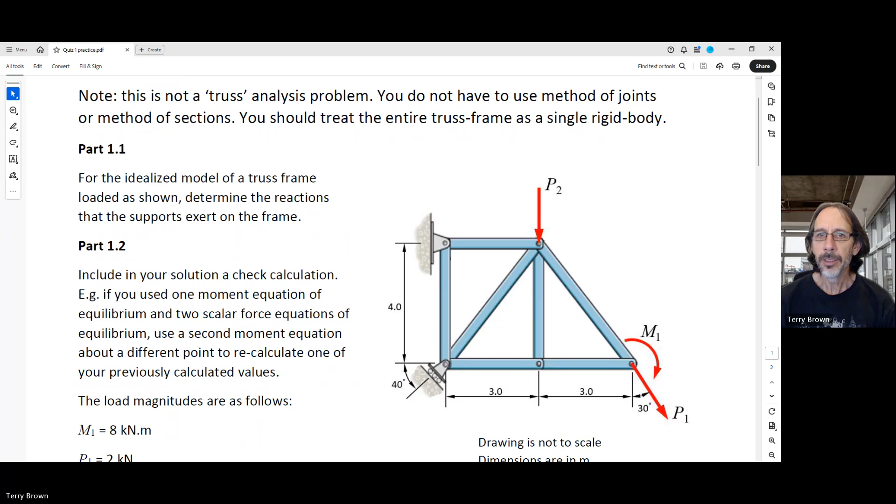Then down here, at the moment we've just got these letters here representing the loads, and we're given the magnitudes of these forces and moment over here. So in the quiz, every student will have a different value for these loads depending on their student number. Okay, so that's the equilibrium part where you look at determining the reactions.

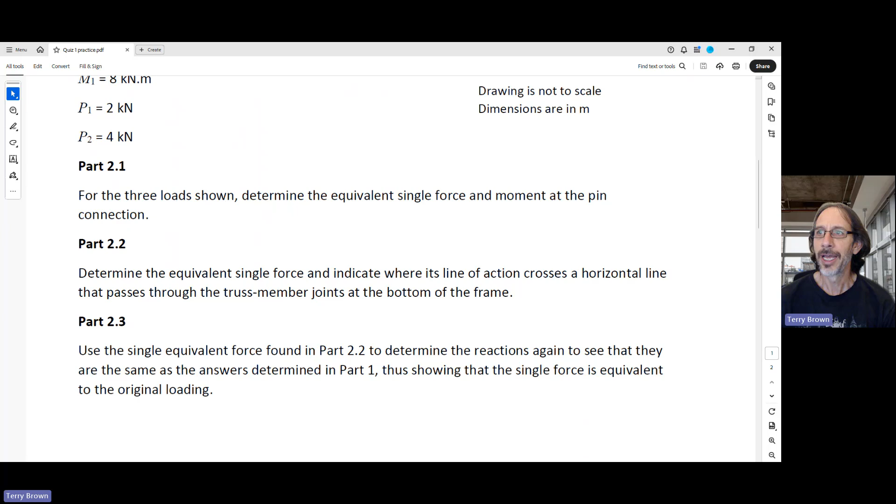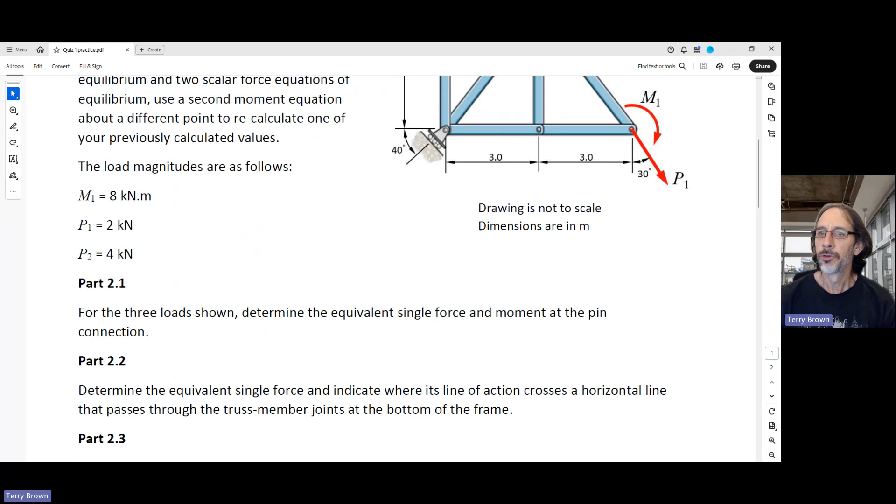And then the second part is to look at equivalent forces and moments and the equivalent single force. So to start with, for the three loads shown, determine the equivalent single force and moment at the pin connection. So up here. And then after that, determine the equivalent single force. So no moment, just a force only. What's the equivalent single force? And indicate its line of action that gives us the same loading, external loading, as what we found in 2.1, and also that we had to start with our three separate loads here.

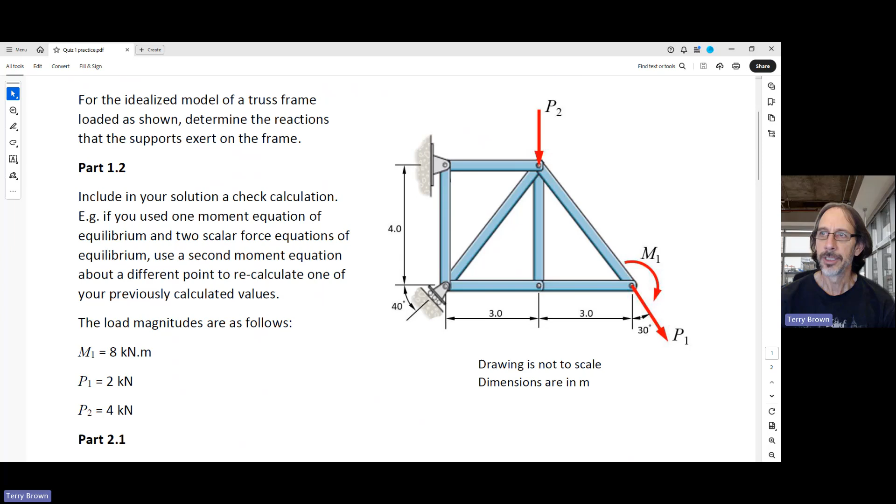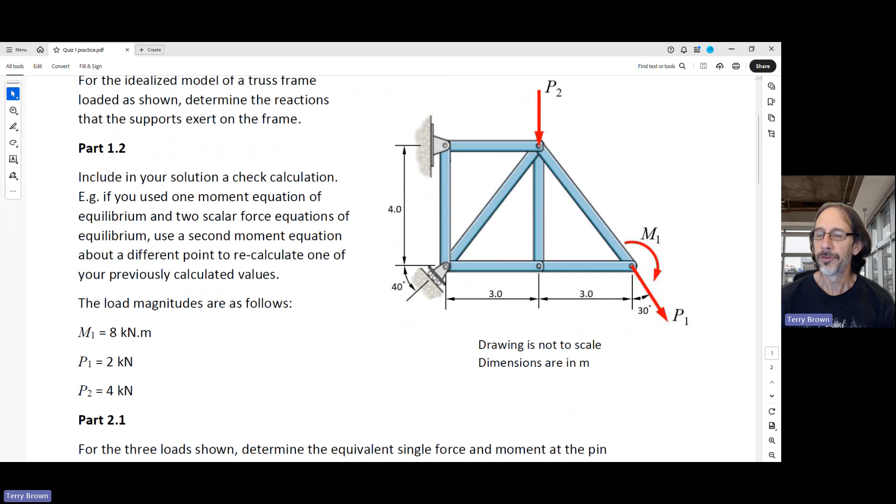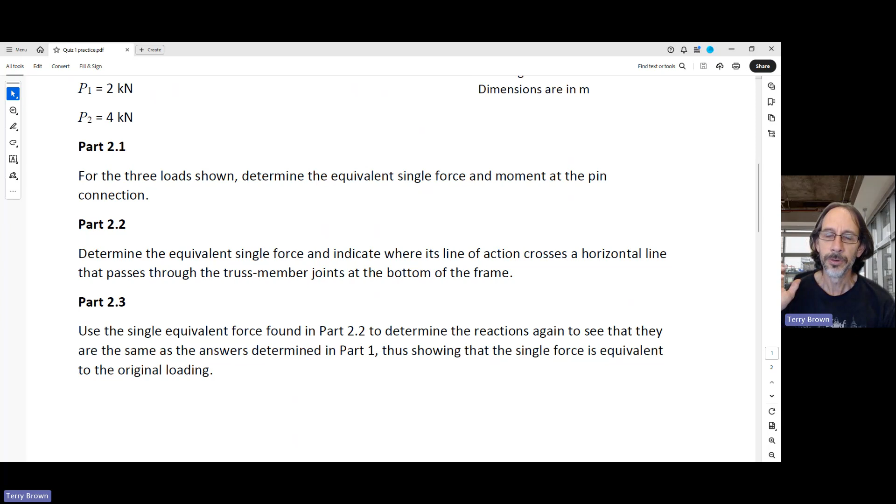And then part 2.3, use the equivalent single force that we found here in part 2.2 to determine the reactions again. So basically redoing part 1.1 to determine these reactions, but this time we're just going to use that single force that we've found to be equivalent to the original loading. So part 2.1 to 2.3 goes through equivalent systems, equivalent force, moment systems, but also shows you a way to check your calculations that we did up here.

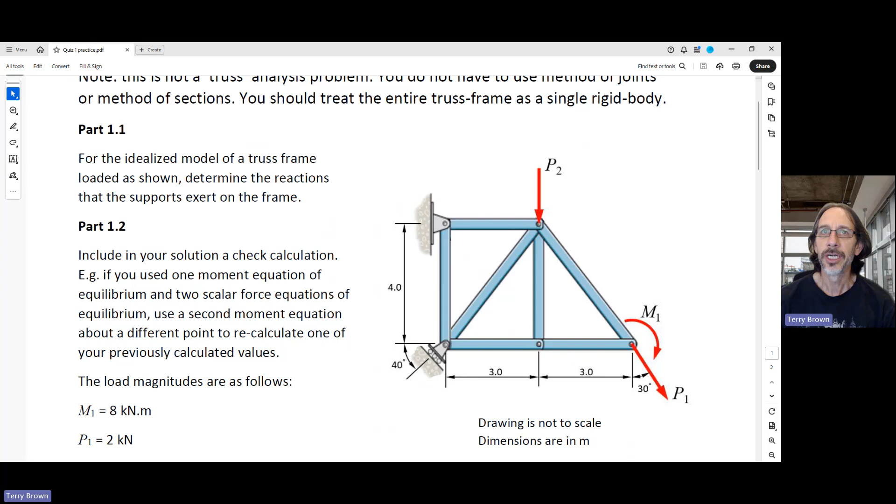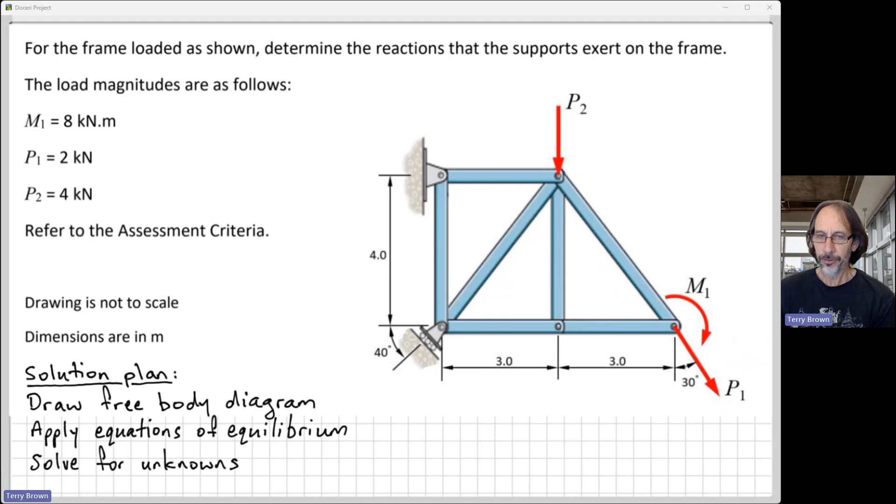All right, so let's have a look at the solution. I'm just going to change the window that we're looking at here. I'm just going to use my iPad to do this, so I'll be looking down a little bit if you're wondering why I'm looking down. So thinking about our solution plan, as usual, we're going to draw the free body diagram, apply the equations of equilibrium, solve those equations for our unknown forces, and then we're going to check our answers. Firstly, drawing the free body diagram.

Again, just a simple representation of the outer shape of the body that we're analysing. So in this case, it's a truss frame, but we don't have to worry about the internal members. In this case, we're just going to treat the whole thing as one rigid body. So that's what I've drawn there, and I've put on the dimensions. And then I start putting on my loads. And that's usually the easiest place to start when drawing your free body diagram and starting to think about the loads and the other forces and moments that are acting on the body.

So we have that. Now we need to think about what's happening at the supports. So at the support up here, at this point here, I'm going to give them names in a second. So in this particular version of the quiz, I didn't have any because I left it to the students to come up with their own letters.

All right, so up here we've got a pin connection. At a pin connection that's fixed to the ground, we'll have a vertical and horizontal reaction force. That could be in any orientation. They don't have to be vertical and horizontal, but because all of our dimensions are vertical and horizontal, that's the most sensible direction to have our reactions. So I've just put that in, and I haven't put the arrowheads on yet because I'll think about

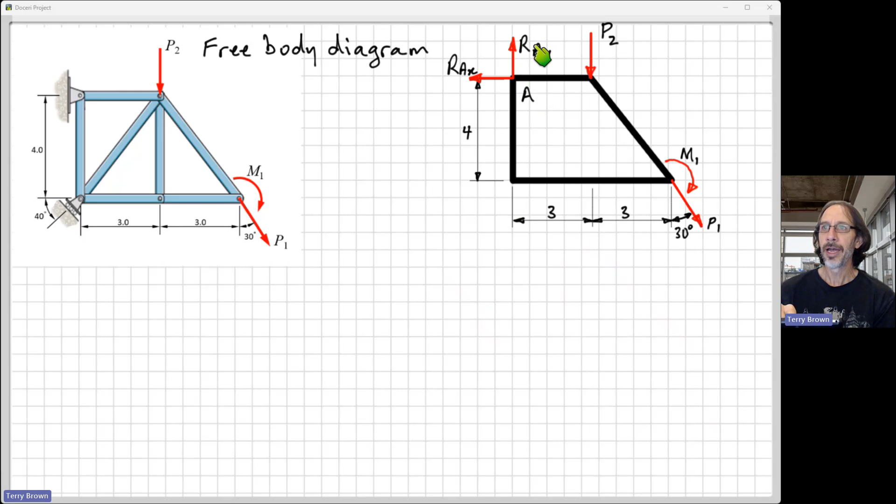In many textbooks and other people's solutions that you might see, they might just call this AY and AX. That's okay, but I tend to prefer using R or F just to indicate clearly that it's a force. Because if you wanted to make this a parametric problem and have parameters for these dimensions rather than specific numbers, then you'll be wanting to use letters to describe those dimensions. But anyway, that's another video.

All right, so now that we've started using X and Y components, we should really indicate what X and Y are. It's fairly obvious from my diagram because I've drawn it nice and neat and clear, and Y is obviously going up or down, and X is going horizontal, right? So here I've shown the positive senses and the directions for X and Y. And I've also indicated that anti-clockwise is going to be positive for my moments. Right, so looking down here at this point here, I've already started the solution.

Right, what do I put down here? If I look over here, I can see over at the bottom left-hand corner of the truss, I've got a roller support, and that roller support is sitting on a sloped surface. And for a roller support, we only have a reaction force that's normal to that surface, none tangent to the surface. So that's what gives me this direction of my reaction force over here. Right. I don't have the sense shown yet.

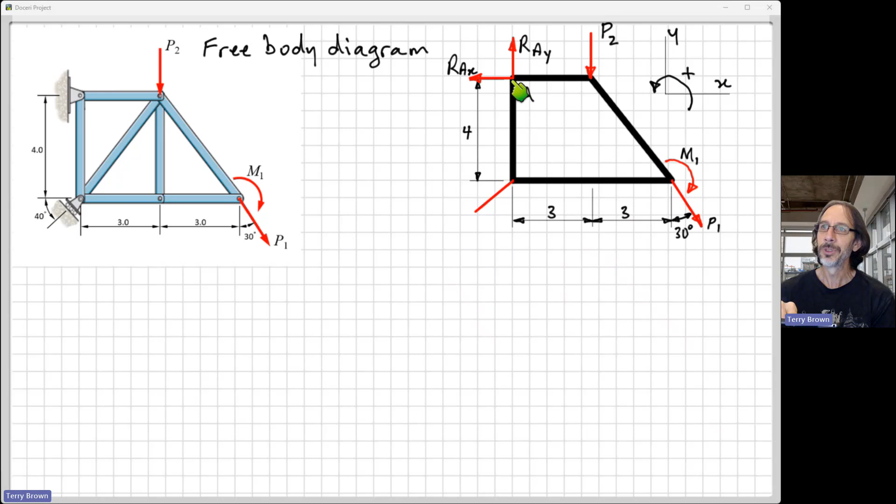How would I work that out? If I took moments about this point up here, so about point A that I've now labelled, this force here, P2, is tending to cause a clockwise rotation. M1 is causing a clockwise rotation. P1 is causing a clockwise rotation about this point, about point A. It's a bit tricky. The horizontal component of P1 here would be causing an anti-clockwise rotation. But on the balance of things, it's probably more likely that we need an anti-clockwise moment from this force.

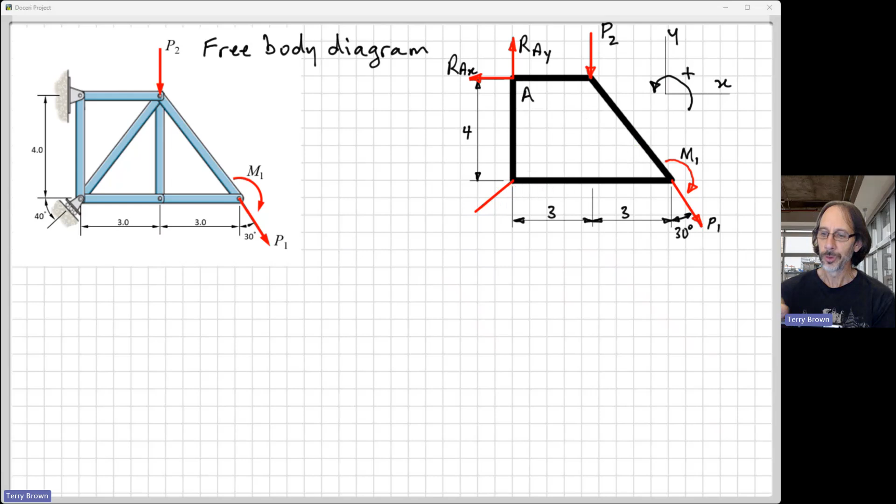So I've put it shown acting upwards and to the right. And I've also just copied over here my angle that force acts at. Okay, so that's my completed free body diagram. Now I can start to write my equations of equilibrium. Oh, not quite complete. Label my unknown force here, RB.

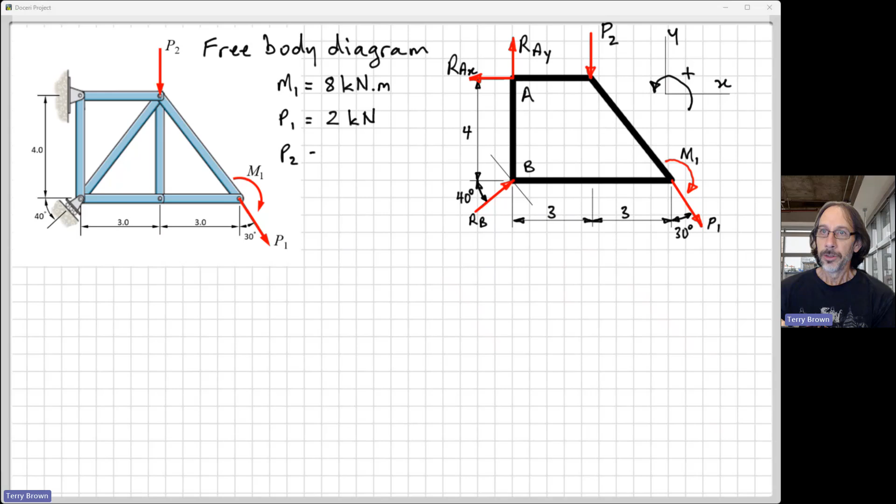So again, I've used R subscript B rather than just B, just to be clear that this is a force, not the point B that I'm referring to when I write my equations down here. All right, so just putting on my solution there for reference, the magnitudes of those forces that we were given, applying equations of equilibrium, starting with a moment equation.

Generally, you would start with the moment about a point where you've got two unknowns. Here, we could have started with point B, taking moments about point B because RAY passes through point B, so you can find RAX directly. But you can do that as an exercise or do that as a check. All right, so for this solution, we're doing sum of the moment. So remember, the complete writing of the equation of equilibrium here is sum of moments, capital M, about which point? About point A, and we're taking anti-clockwise as positive, all equal to 0.

All right, so then if we apply that equation and we look at our problem, we've got P2 here, its moment about point A, perpendicular distance is 3, so P2 times 3, tending to cause a clockwise rotation about point A, so therefore negative. So we have the negative sign out the front. All right, so what's our next one?

I've just started to draw. So looking at P1 over here, just drawing in my components just for reference. So horizontal component here. So if we draw our little right angle triangle here, this length here will be P1 sine 30 because this is the opposite side to the 30 degrees here. So P1 sine 30, and this component down here is P1 cos 30. Right? Again, note how I've drawn my components so that their line of action passes through the correct point.

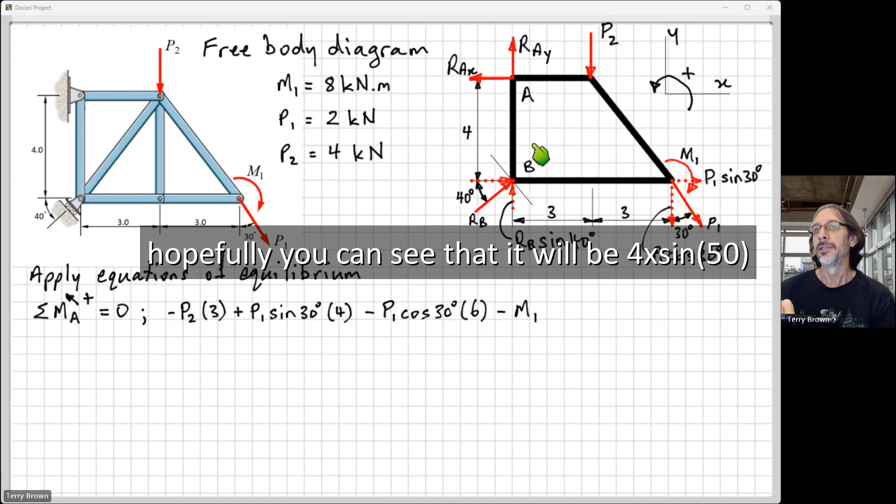And now we've got the applied moment to deal with. It's clockwise, as shown, so minus M1. And that's it. Now we've got to put our unknown in, right? Okay, so over here, we've got our unknown force RB. We can try and work out our perpendicular distance here from the line of action of RB to point A. It's not that difficult in this case, but generally we'd use Varignon's theorem and break this thing up into components. So we will have here, again, just putting those components in, making sure that we keep their line of action correct. Don't put RB sine 40 or RBY out here, for example, or RBX down here. Right? Put them where their line of action is correct.

So we have RB cos 40. Its perpendicular distance is 4. And it's tending to cause an anti-clockwise rotation about point A. So that one's positive. The vertical component of RB sine 40, its line of action passes through point A, so we don't have to worry about that. And now we're all equal to 0. And the solution has run on a little bit further than I wanted it to there, but I've just rearranged that equation here to find RB. Right, so I've just rearranged that. So if we put the values into the calculator, we get 8.613 kilonewtons.

Okay, so remember to carry at least 4 significant figures through all of your calculations to minimize round-off errors. You can carry more if you want, but at least 4 should be carried through your calculations. Okay, so now we look at our other equation of equilibrium. So this one's usually a little bit easier for most people. And again, the solution has run on a little bit further than I really wanted it to, but anyway.

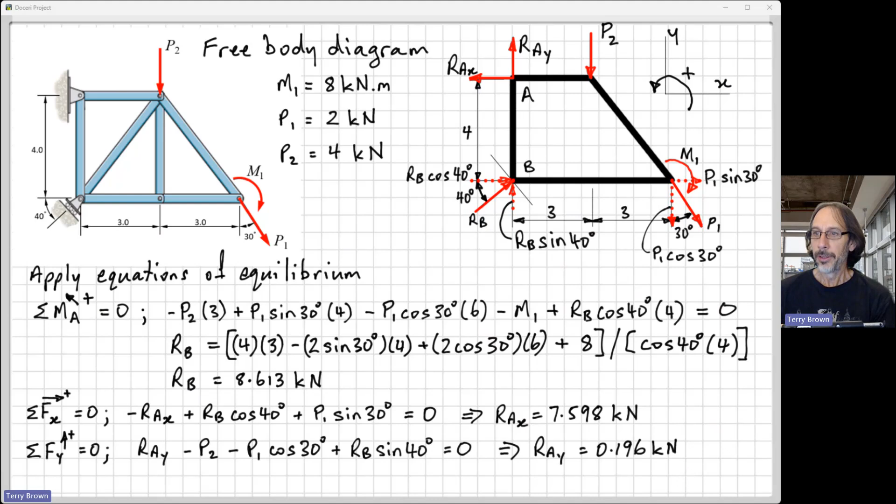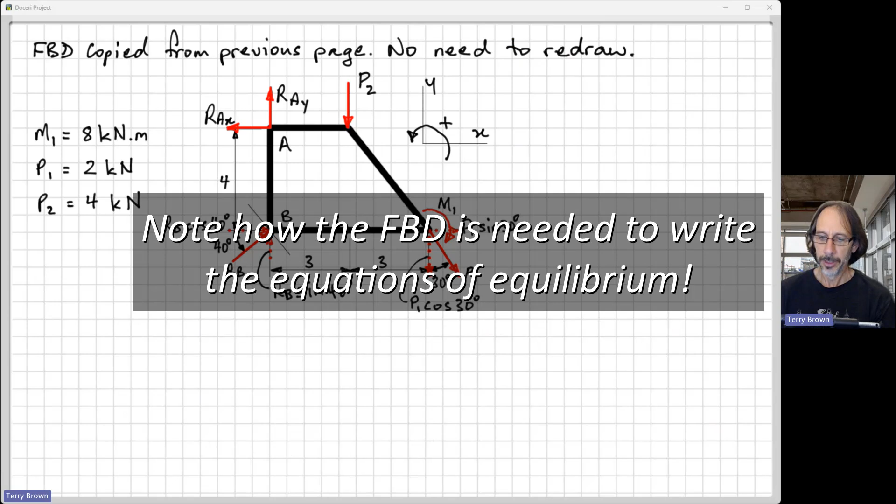Okay, so now we need to check our answers. If we go to the next page, I've just copied over my free body diagram. You don't need to redraw it at this point in your solution. I've just put it here so we can refer to it without having to go back to the previous page. So again, apply the equation of equilibrium. Previously we used point A to start with, so this time we're going to take moments about point B. And let's have a look at what we've got.

Starting here with taking moments about point B, we've got P2 times its perpendicular distance to point B, which is 3 meters here, and it's tending to cause a clockwise rotation. So we push down on here, and if we hinge about point B, that's going to rotate clockwise, so therefore that's going to be negative. Then if we look at the vertical component of the force P1 over here, P1 cos 30, perpendicular distance to point B is 6 meters, and again tending to cause a clockwise rotation, so again negative.

We've also got the M1 applied moment here, clockwise, so that's negative, put that in, and then we've got RAX up here. Perpendicular distance to point B is 4 meters. So that's our perpendicular distance here, tending to cause an anti-clockwise rotation about point B, so that one's positive. RAY, its line of action passes through point B, so no moment there. So we can put that all equal to 0, rearrange the equation, substitute our values, and solve for RAX, and we get the same value as we got before. If you get a different value, then either your equation here is wrong, or the one that you got on the previous version of the solution was wrong.

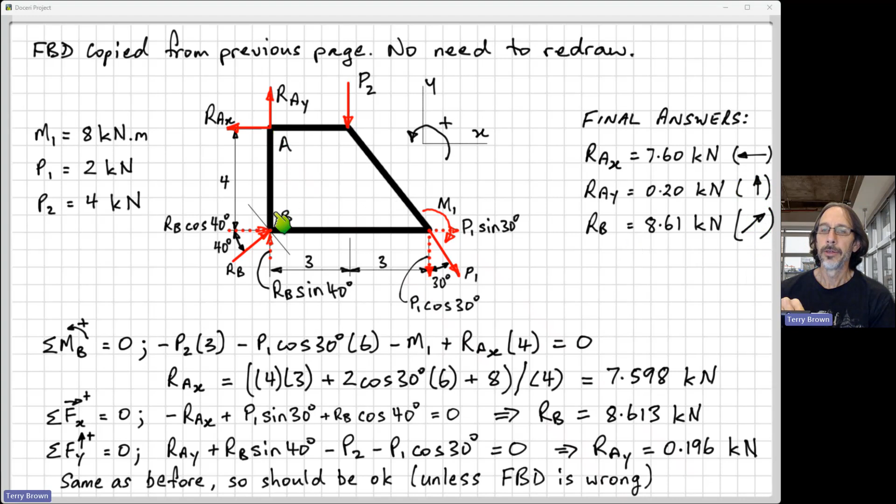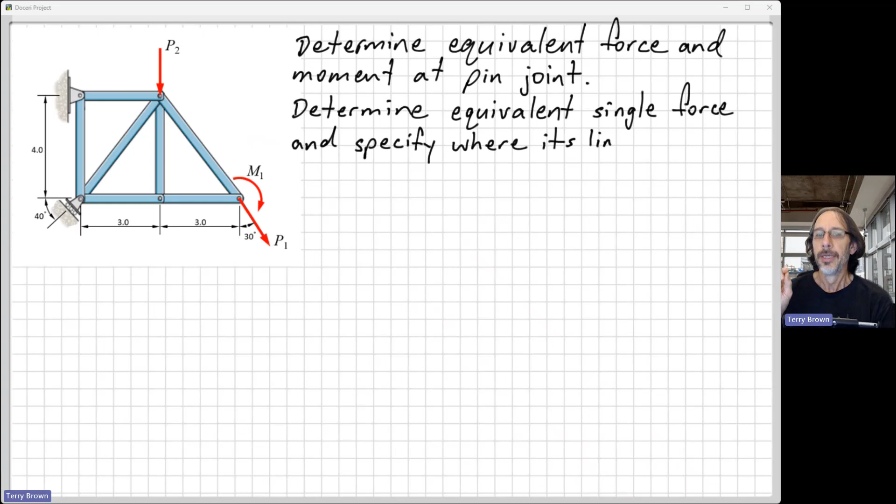All right, so that's that part of the solution, and I've just indicated here the directions of those reactions that the supports exert on our truss frame. So the next part of the problem was to determine the equivalent force and moment at the pin joint, and then after that, determine the equivalent single force. So you start with a force and a moment here, and find the equivalent single force acting somewhere. And here I've said to specify where its line of action crosses a horizontal line through here.

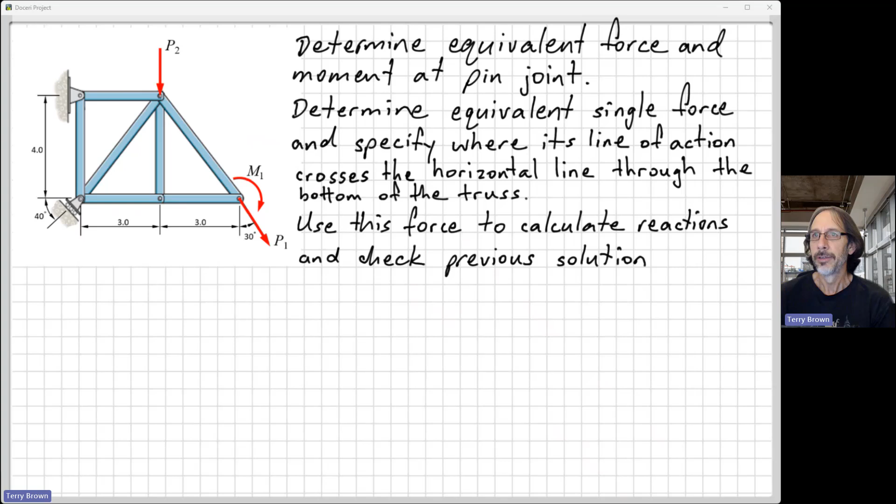And then as an extra check, and also to show you that all of these different systems of forces and moments are equivalent, use just the single force to calculate the reactions again to check the previous solution. Okay, so first let's look at determining FRX. What is the equivalent to all of these forces and moments here?

So we look at finding the resultant of the x components of all of the forces, and I've just redrawn here the coordinate system for reference. In the x direction, the only force that we have is the horizontal component of P1. Okay, so I'm not going to spend too much time on this. We did this in the previous part of the video, how to work out these components.

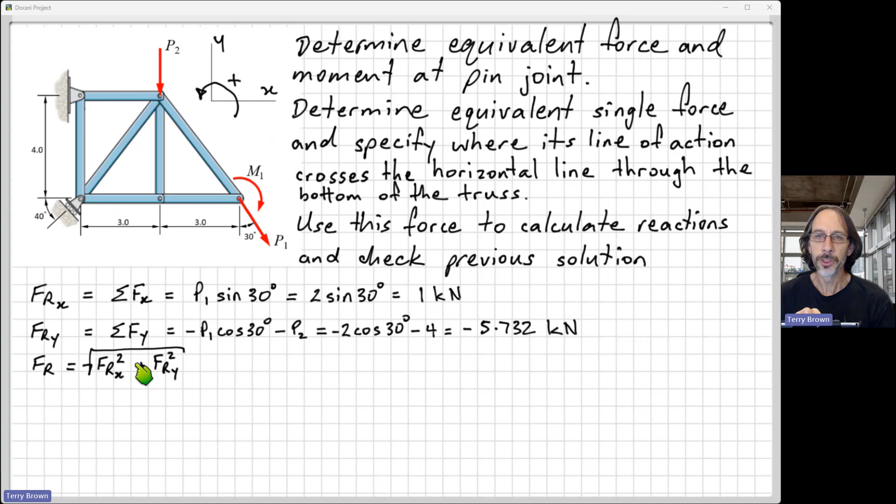And then our resultant of the y components. So here we've got P2 plus the vertical component of P1. Okay. And they're in the negative direction. We do the calcs for that, and we get those 2 reaction components. And to find the resultant, we just do the square root of the sum of the squares. It's basic Pythagoras, high school maths, and we get 5.82 kilonewtons.

And I've just drawn that over here. So we've got FRX to the right, FRY downwards, and our resultant looks something like that. And if we want to find the angle in here, we just use the inverse tan of opposite over adjacent. So the opposite side of this triangle here is FRY, the adjacent side is FRX. Put in the values and get about 80 degrees.

All right, so now we need to look at the resultant moment. So this point up here we call point A, and we're taking anti-clockwise as positive. So look at the resultant moment. So we need the sum of the forces times their perpendicular distances plus any applied moment. So we've got 1 in this case.

All right, so let's go through this. So we've got P2 here times 3, and it's negative as we discussed before. And then we have P1 cos 30, so the vertical component here, times 6, again clockwise, so negative. And then we have the horizontal component times its distance here, 4, and it's tending to cause an anti-clockwise moment about point A. So that's a positive one. And then we have M1, which is clockwise, so negative.

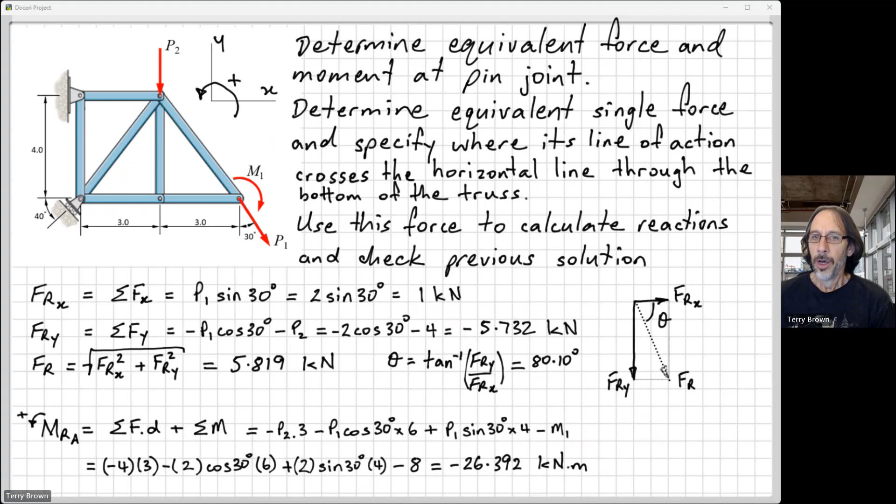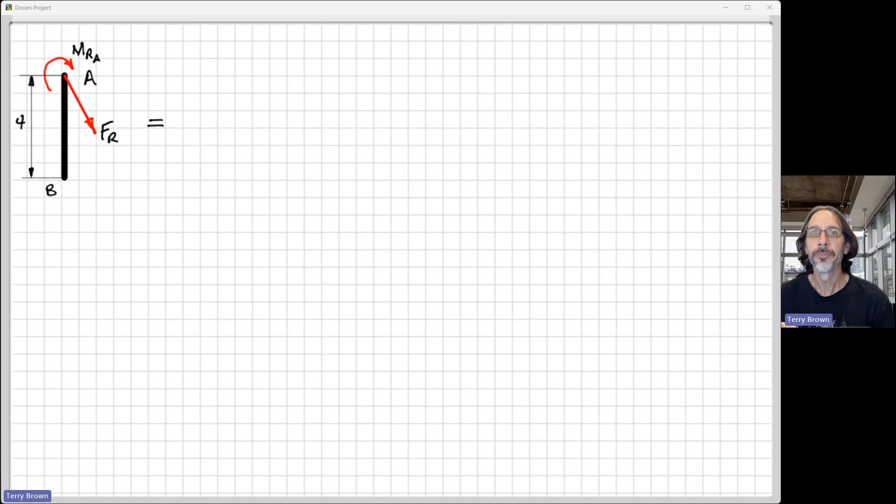Okay, all right, so if we now substitute all of our values into that expression, we get our resultant moment, which is minus 26.39 kilonewton meters. Okay. All right, so I'm just showing the resultant force and moment that are equivalent to those two forces and moment that we had originally. This is just showing the left-hand side of the truss there, not showing all of it, just to simplify my diagram.

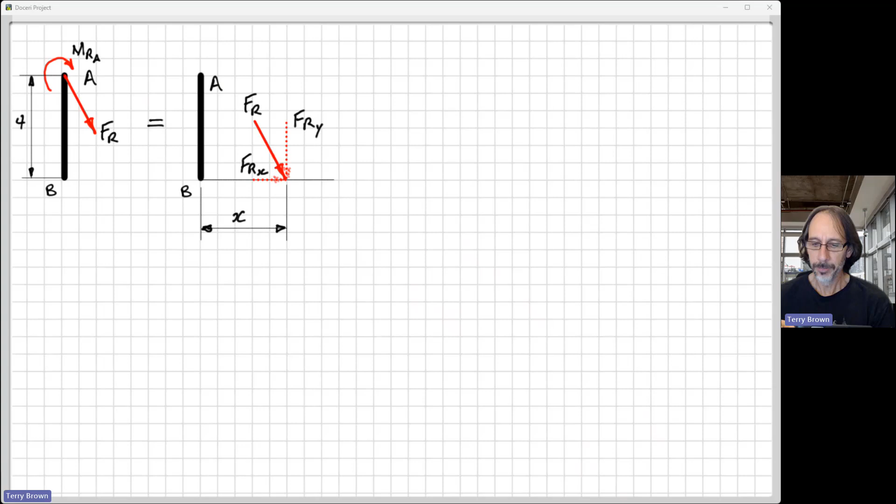And now what we want to do is to find the location where we can have just a single force that's equivalent to this force and this moment. Right, so we can see that we've got a moment clockwise. So hopefully you can see that we're going to have to move this force out to the right somewhere, okay, for this force to cause a clockwise moment about point A.

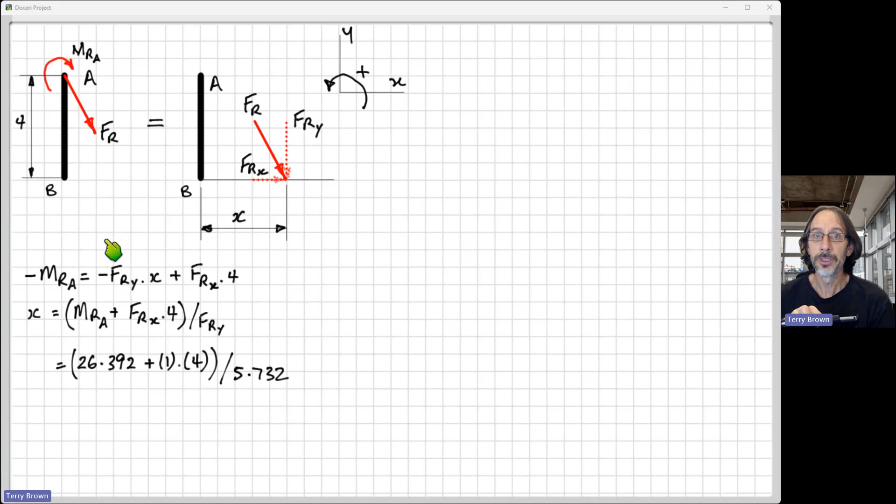So if we put the values into our calculator, we get 5.302. And now if we redo our equilibrium equations using our free body diagram, now it's just an equivalent single force, which is now down here. All right, so we don't show the other forces that we had originally. This force here now on its own has the same external effect of those two forces and moment that we had originally. So let's take moments about point B here. We could have taken moments about A, doesn't really matter. I've just taken moments about point B.

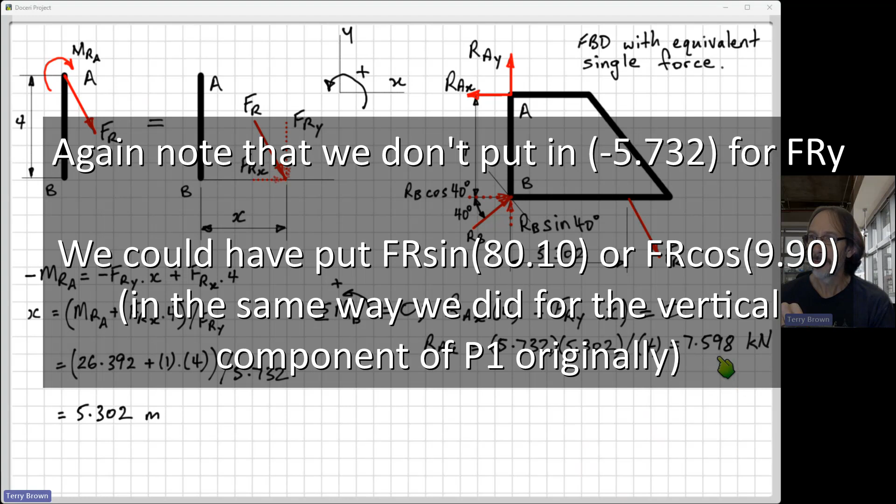So we've got RAX times 4 tending to cause an anti-clockwise moment, so that one's positive. And then we have FRY, so the vertical component of FR here, times X, this distance that we just found, and that's tending to cause a clockwise moment. So it's negative here, all equal to 0. Right? So all of the other forces have no moment effect about point B. So rearrange that, put in the numbers, and we get RAX equals 7.598, the same as we had before.

And we can just redo our force equilibrium equation. So FRX down here, plus RB cos 40 minus RAX, equal to 0. So we just solve for RB this time, and we get the same value that we had before. And do the same thing for the forces in the y direction, all equal to 0. And put in our values, and we get 0.2 kilonewtons, the same as we had before.

Okay, so this not only is a check of what we've done before, but also demonstrates that this single force here that we've determined is equivalent to our 3 external loads that we had before, the 2 forces and the moment.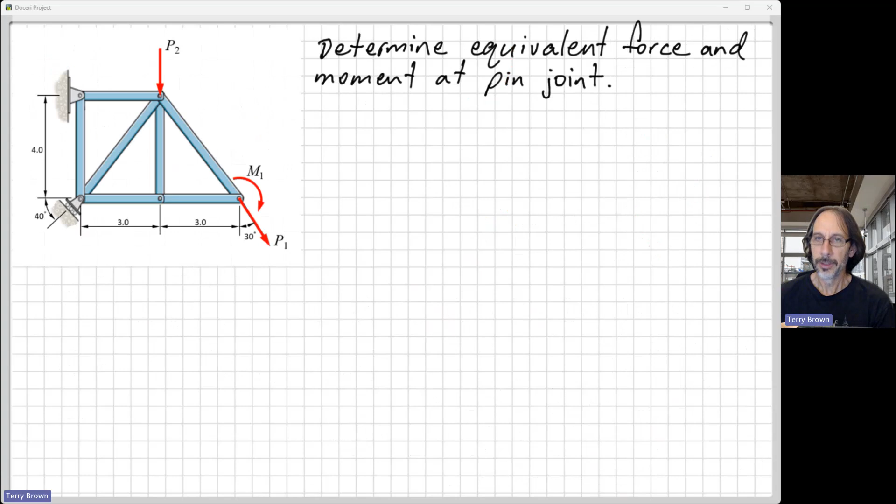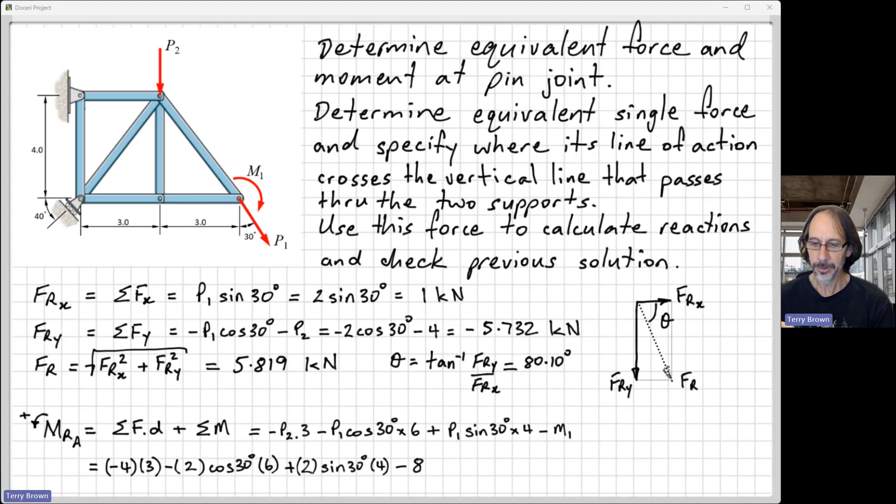Right, so I've just done it again here. So instead of finding the location of the resultant force down here, I've found it up here. I'm not going to, I've already taken too long with this video. So this is the same as we had before. It's all the same, just repeating that there, so you don't have to worry too much about that. So now finding the result, oh, this is the same as before, yep. But here, I want to find the position of the resultant force above point A on this vertical line. So go through the same process that we did before.

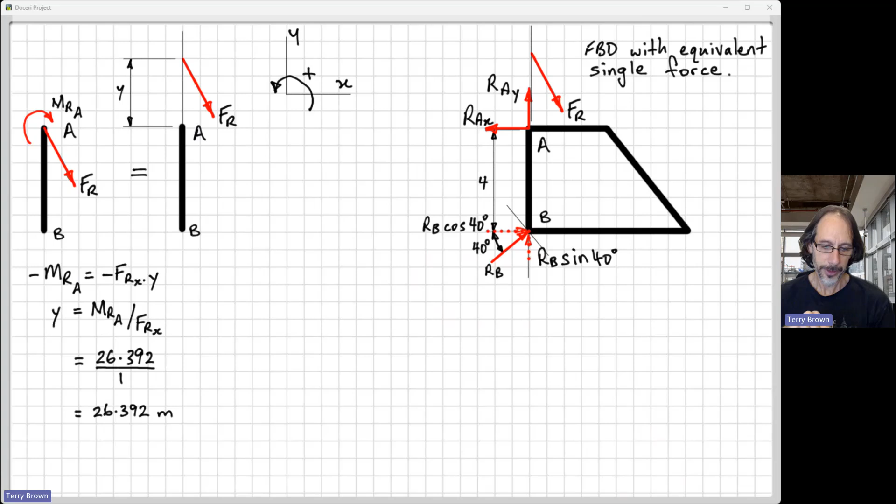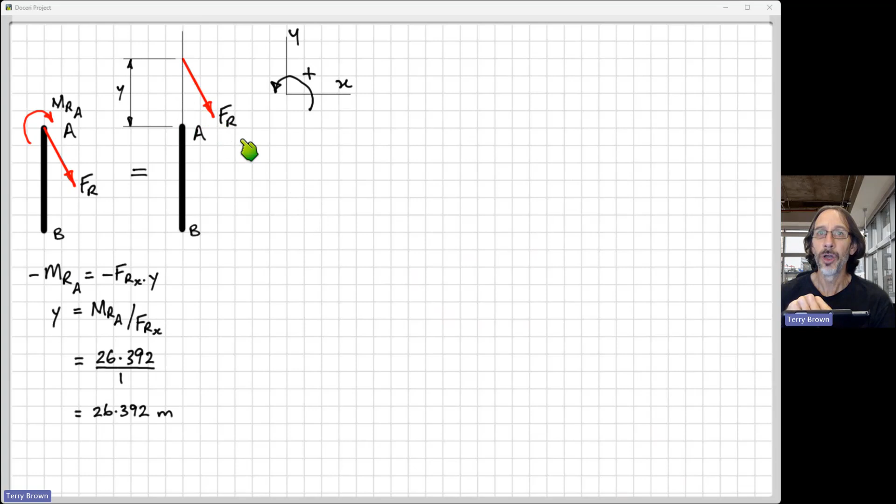Here, let's just go back a step. Right here, we got 26.39 meters, so like way, way above here. And that makes sense because if you remember, we've got a force acting down here, or the original force, with a force up here, force out here, a moment out here, all tending to cause a clockwise rotation, right? So for this equivalent force to have the same moment effect as all of those 2 forces and the moment that we had originally, this force has to be way, way up here above A.

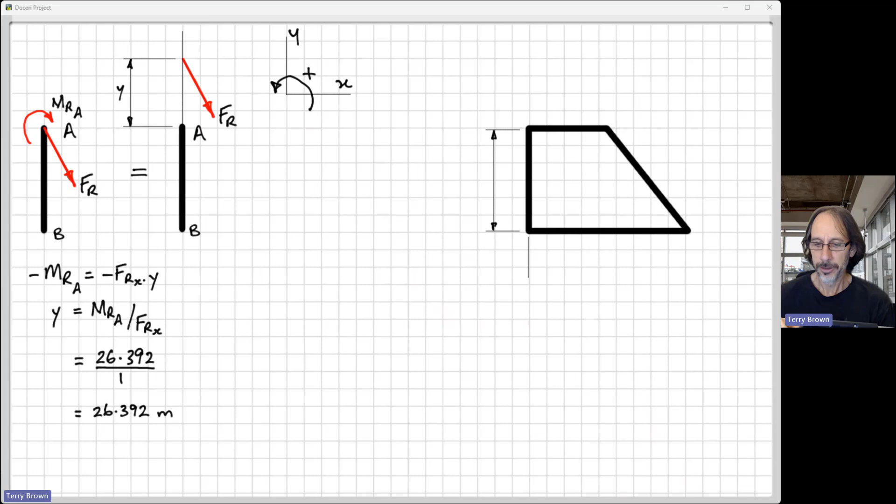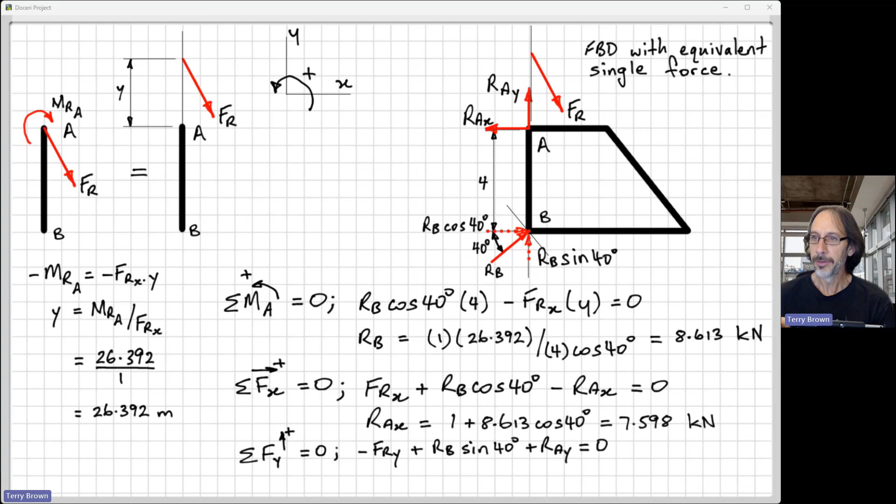Right, so just redoing my free body diagram again with the single equivalent force. Sum of the moments about A, so I did moments about A this time and found RB, so similar to what I did originally, and got the same value there. Sum of the forces in the horizontal direction equals 0, and this is all the same as previously, right? And we end up with the same values.

Okay, so I hope that was helpful. It's quite long to go through all of that, but that covers how you do rigid body equilibrium problems, how you check your answers, looking at using different points to calculate moments, and also going through how to determine equivalent systems. So going from multiple forces and moments to just a single force.